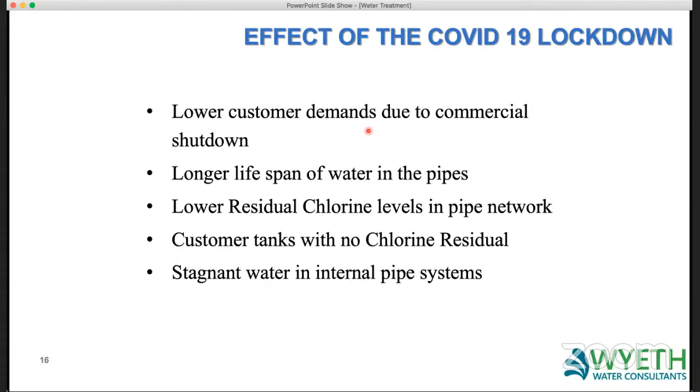Thank you everybody for attending today. As Dato mentioned, I'm going to be talking first about water treatment and the supply side of things, which is the disinfection and chlorination of water in the pipes to reduce any risk of bacteria forming or getting to our houses through our taps from the water supply system.

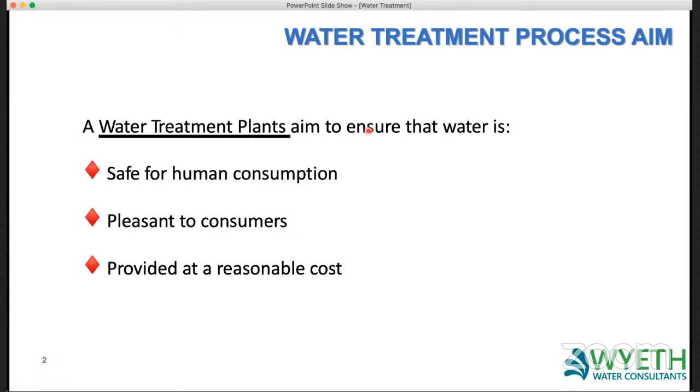All water supply companies have water treatment plants that they use to treat water from the raw water supply, whether it's from a dam, a river, or a ground source. The main aim for these water utilities is to make the water safe for humans, not just from the output of the plant, but also going through the pipes and coming out of the customer's tap. Ultimately the water companies would hope that the water coming out of your tap is drinkable, and that would be their ultimate aim.

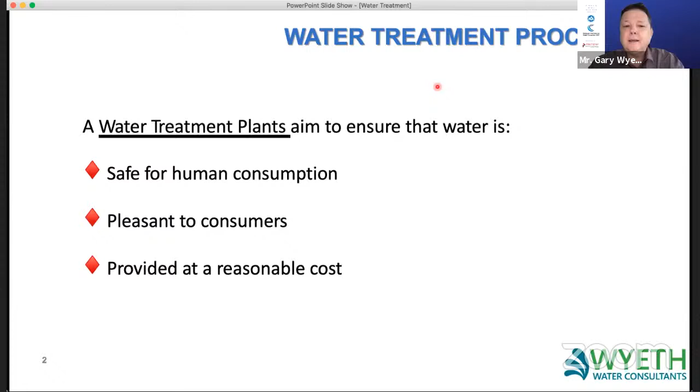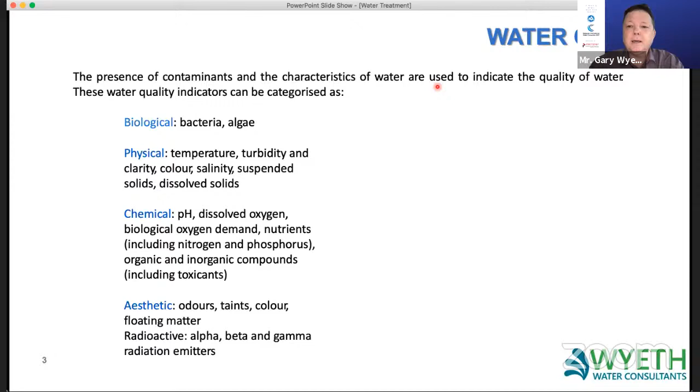There are lots of criteria that water companies look at with raw water sources. Probably one of the main ones is physical, which is turbidity, suspended solids, and color - they want to get most of those out so you have nice, clean, clear water coming in. There are also other chemical and aesthetic criteria, and we sometimes put in additional treatment processes to remove those problems. But the other main criteria is the biological one - bacteria and algae - and that's another critical factor the water companies are trying to treat at their water treatment plants.

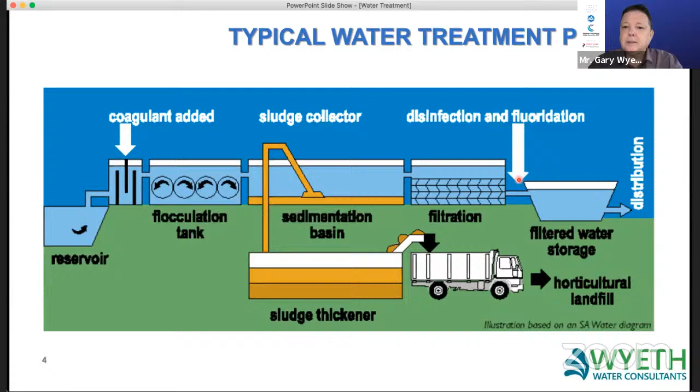But it's actually the disinfection that we're looking at, and this is where we want to get rid of the bacteria. At the end of the system, after filtration, we would try to disinfect the water to get rid of the bacteria that are naturally in the raw water source.

There are a few methods for disinfection: chlorine gas, chloramines, ozone, ultraviolet, chlorine dioxide, hypochlorite. So there are various ways we can do it, but generally chlorine is used in most water supply systems, either as a gas or a solid or a liquid. Generally it's a gas for a medium to large size water supply company, but the smaller ones would move more towards a solid, which requires less maintenance and is not so dangerous in terms of handling.

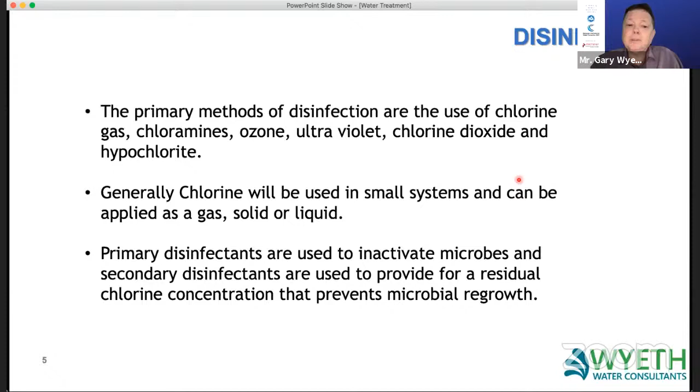With disinfection, we actually have to look at it in two different ways. We have primary disinfection - disinfecting the raw water and the bacteria in it to get rid of that initial bacteria. But then there's secondary disinfection, which is where we provide a residual chlorine - additional chlorine that stays in the water as it flows through the pipes to prevent microbial regrowth.

So when water companies are dosing their chlorine, they're looking at it in two different ways: the chlorine demand, which is how much chlorine they need to put in initially to get rid of existing bacterial growth in the raw water, and the free residual chlorine. This is the key one - the residual chlorine that will still be in the water as it leaves the treatment plant and moves through the pipe system.

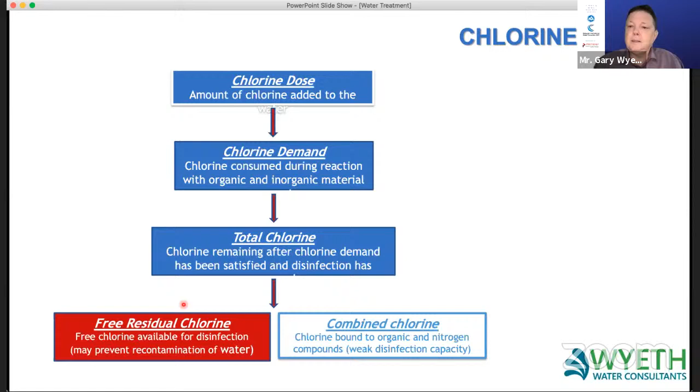So you may have a water treatment plant which has 2 milligrams per liter of chlorine residual coming out of the plant, but they've actually put in more than that to kill off what was already there in the raw water supply.

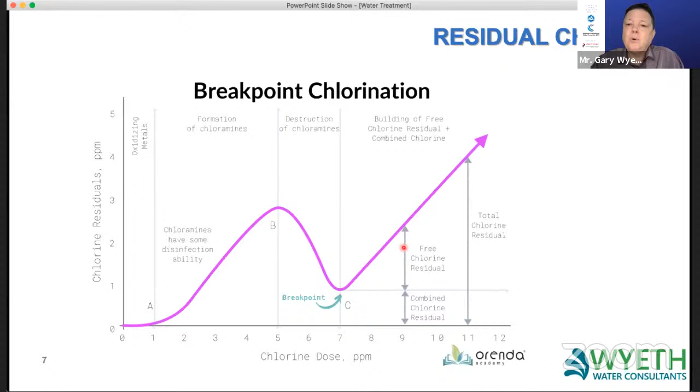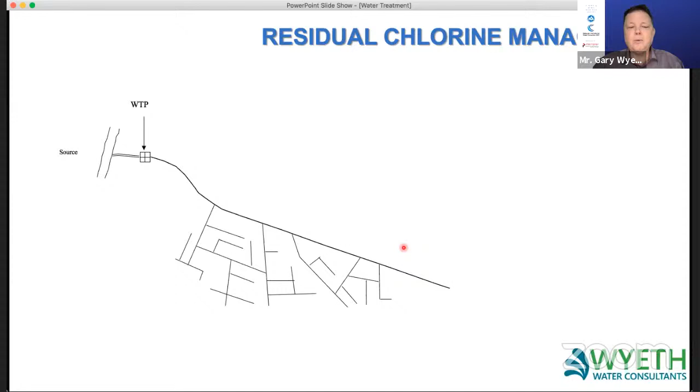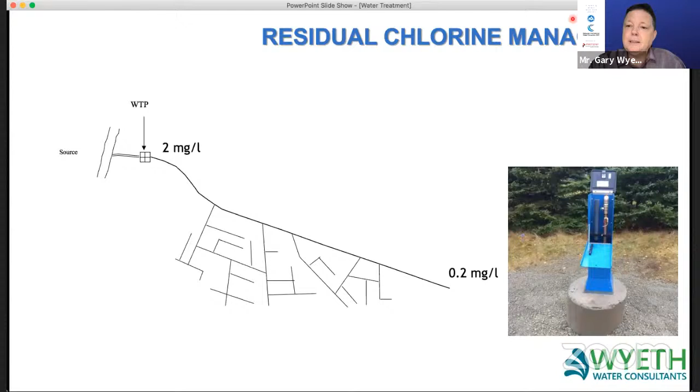These sampling points tend to be at the extremities of the system, because that's where you want to have your minimum chlorine levels. So we're looking at probably a minimum of 0.2 milligrams per liter. And so what they would do is adjust the residual chlorine at the outlet of the treatment plant to make sure that you're achieving that minimum residual chlorine at the end of the system.

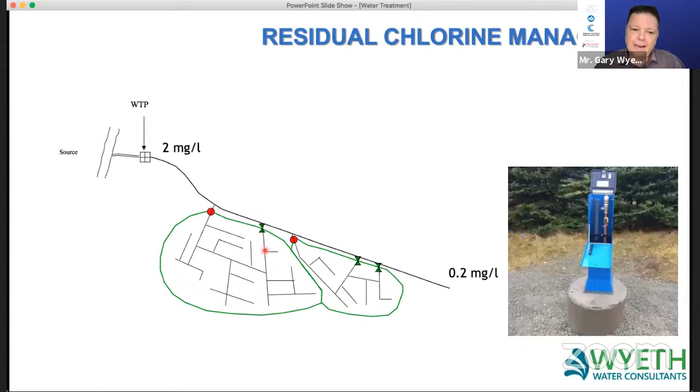And what can happen is we can actually get stagnant water at the end of these pipes here. So if you do have a length of pipe like this, which comes to a closed valve, and there are no customers towards the end, then flushing becomes a necessity to get rid of that stagnant water, especially after a number of days in there. So the water companies are looking to put in their residual chlorine to achieve this minimum residual chlorine at the end of the system.

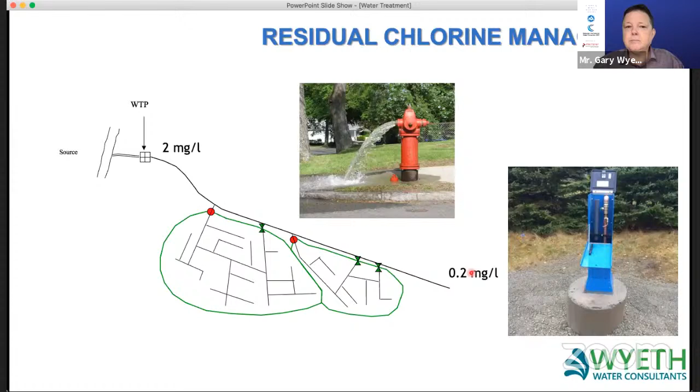But what can affect that chlorine as it moves through the system? Water age. Chlorine will naturally dissipate over time as it goes through the system. So we have to be aware of how long the water is taking to flow through the network, and this is something the COVID-19 lockdown will have affected. Instead of demands at 100% and water taking maybe 5 days to get to the end, you might have demand at 50%, so it's now taking 10 days. And of course, the chlorine will be dying off over twice as long a period.

Storage tanks. When we have storage tanks where water flows in, if we're not getting the level of the tank dropping and filling again, you're not actually turning over the water in the tank. This can mean that you're getting stagnant water in your tanks as well. So it's always best to set up your tanks with some sort of level control so that you're getting a fall and rise from them.

Limited customers in areas. Normally we look at rural areas, because in rural areas you have limited customers and that's where it's going to get affected. But during the COVID-19 lockdown, we're also looking at industrial areas where factories have shut down. So now an industrial area which used to have very high flows feeding all of the factories has very low flows or sometimes zero flows, and you're going to have a lot of stagnant water in those pipes.

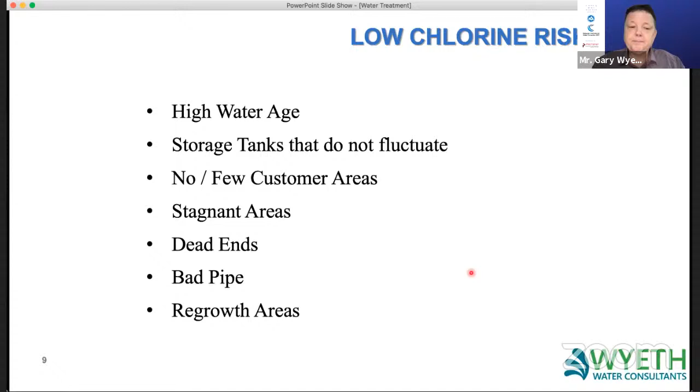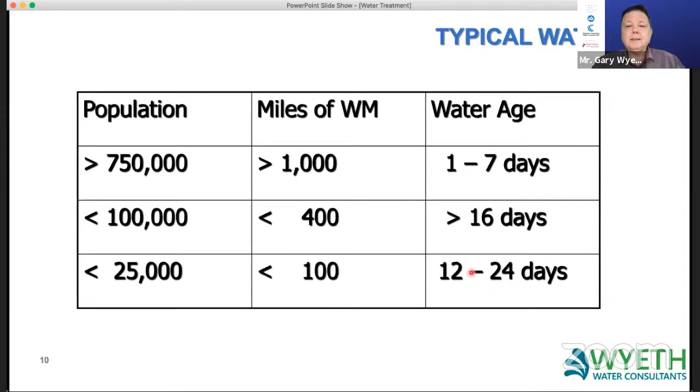So that's something that water utilities have to be aware of, that their water is going to be in the pipes longer. How do we mitigate these? Well, it's reducing the detention time in storage tanks. Maybe we can look at bypassing storage tanks if the flows are very low during these lockdown periods. We need to ensure turning over of distribution systems, and this may mean flushing in some places to get out there and start flushing the mains.

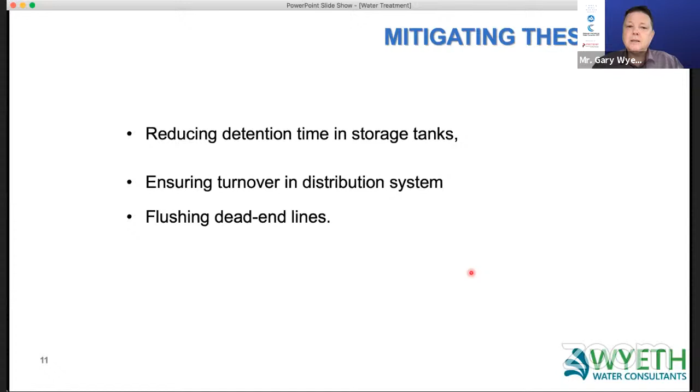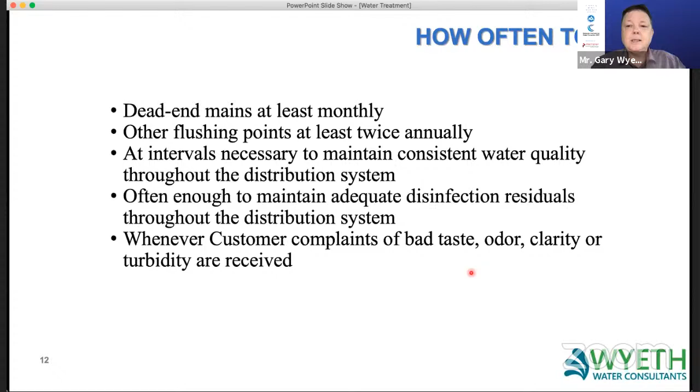How often should we flush? Well, if it's a dead end main, we should really be flushing it every month just to clear that stagnant water. Other parts of the network, maybe twice a year. But what's more important is to listen to customer complaints of bad taste, odor, or even turbidity. And those can be indicators of where your pipes need to be cleaned, and that's where we can go out and start to flush.

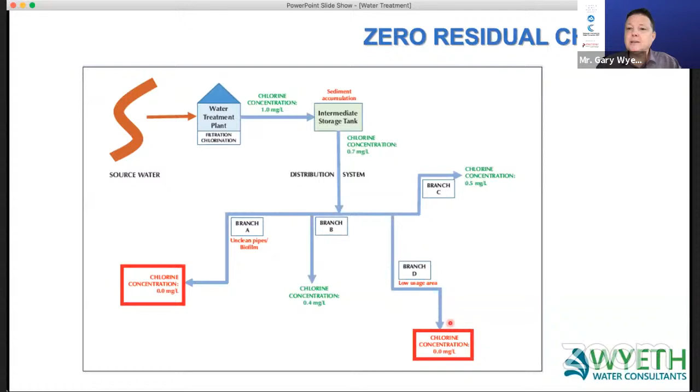Secondary chlorination is a way that we can get around this. So primary chlorination is where we would add the chlorine at the water treatment plant. But down in the distribution system, there's 2 ways of doing it. The first way is if at the end of the system, the residual chlorine is 0, we can go back to the primary chlorination and lift it up, so add more chlorine. But of course, if you do that, you're going to then start to get high chlorine levels close to the treatment plant, and you may get customer complaints of taste or smell from the chlorine.

If you can't increase the chlorine at the treatment plant, you can keep that the same, but you can add in a secondary chlorination system downstream in your network. And a lot of utilities would do that, where they would have a chlorine pump system that pumps chlorine into their pipes at remote areas.

Now, of course, it is possible if you have a large customer, such as a factory industrial unit, a university that has a lot of land, or even a housing development that has a large number of houses or condominiums, they could actually develop their own secondary chlorination system just to make sure that the chlorine is sufficient within their own pipe network.

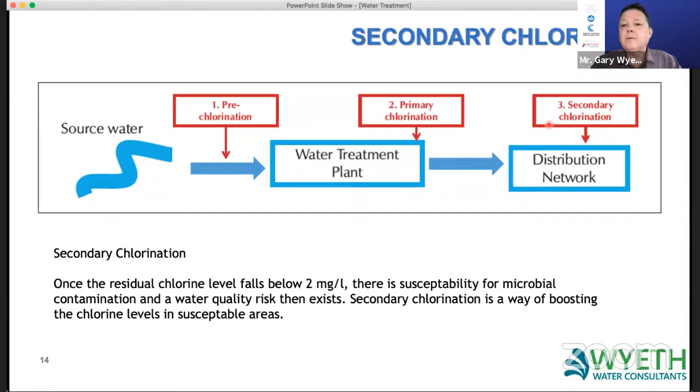Now, customer tanks are a key, really, because a lot of large customers have water tanks where they can store normally 24 hours demand. Now, what's going to happen is during the lockdown, we're going to have some places like factories, hotels that have shut down, where the water is going to remain stagnant in these tanks, and also in the pipes that are after the tanks. So once we then start to open up these factories, these hotels, there needs to be a way to actually empty these tanks, put some new chlorinated water in, and then maybe super chlorinate to just clean the pipes before it goes through.

What's probably a bigger problem is when you have hotels or offices that have remained open. And instead of having a water tank that's got a 24-hour supply in here, we've suddenly got a tank which has got maybe 2 weeks or 3 weeks supply, because the hotel's only got 10 or 20 rooms occupied. And that means that the water is actually staying in there a long time, but the hotel or the factory or the office block still think that the water is safe. But because it's being retained such a long time, it could be a problem.

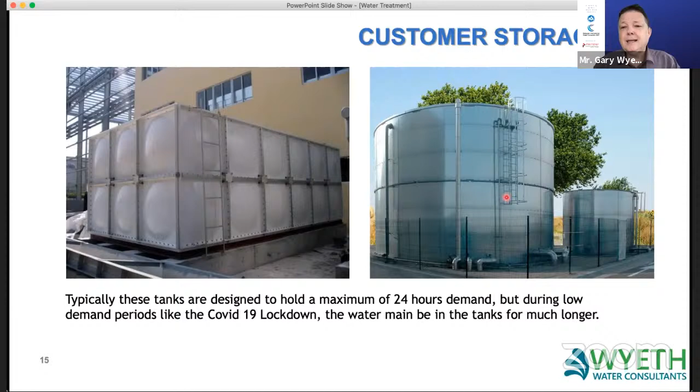So the effect of the lockdown is basically lower customer demands, mainly due to the commercial shutdown, which is factories, shops, offices, but also the hotels as well, many of which still aren't open. And the ones that are open have got very low occupancy. This leads to longer lifespan in the water pipes and also in the customer tanks, which then leads to lower residual chlorine levels in the pipe network.

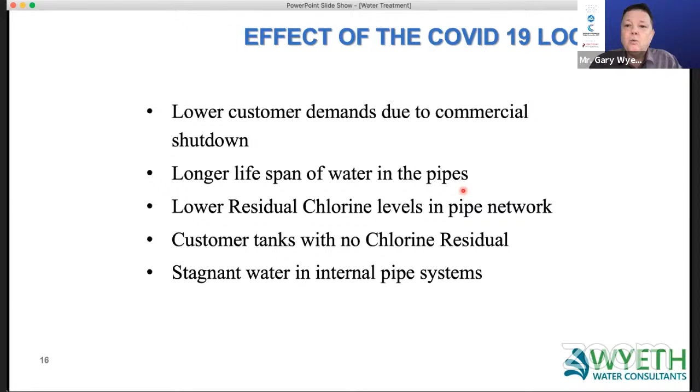Unless you have a very good water utility that's monitoring these chlorine levels constantly and is adjusting the chlorine at the treatment plants. And then, of course, the customer tanks that have got no chlorine residual, which is then flowing into your buildings. I think Dr. Agustin is going to be talking next about the buildings and biofilms that could happen in our pipes when you've got zero residual chlorine. And that comes from having stagnant water or water with no chlorine inside it.

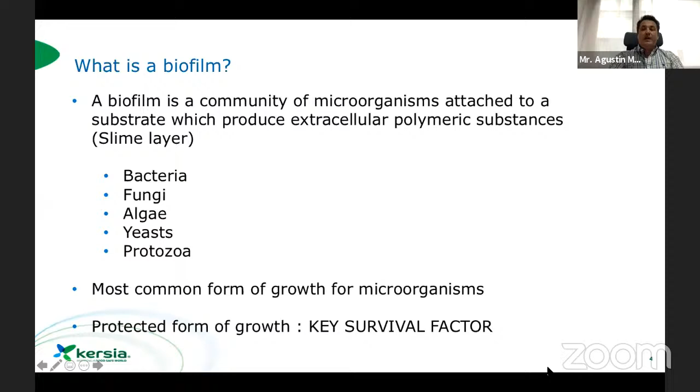It's the most common. We can't see your PowerPoint. Have you shared screen? We cannot see your PowerPoint. Sorry about that. So what are you seeing now? We just see you. Let me see. You need to share screen at the bottom. Yeah, hang on a sec. Apologize. Okay, can you see now? So I missed a couple of slides.

Okay, sorry about that. So where does the biofilm grow? The biofilm can grow everywhere. Basically, they find a weak attachment first, then they become a strong attachment. The attachment gets into the polysaccharide substrate that I described before. It's a very technical issue, but everybody has seen it any time you've seen a dirty pipe, or you had to change a pipe, and inside the pipe you can see a lot of different colors, as Gary described before, with a bad smell, and usually that is where all the germs survive and grow.

How do they form? They form from what they call planktonic cells, the first cells that go into the pipe, and then they start growing and secreting different substances like carbohydrates, proteins, and fat, and they provide the protection of the whole biofilm. So biofilm provides a protective form of growth from environmental stress. Antimicrobial agents, ultraviolet, metal toxicity, acidity stress, dehydration, even evasion of the immune system, all are protected against by the biofilm.

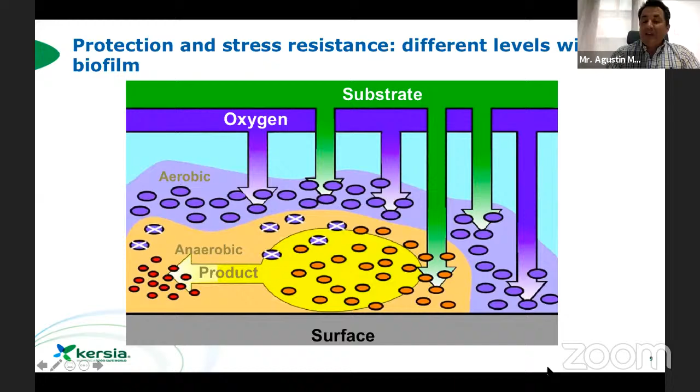Every now and then, the microbiology will break the barrier and move into planktonic cells, as you can see on the right part of the screen. And these cells will go into the water or into the air, etc. Basically, we have persister cells, and this is a subpopulation of biofilm which can remain viable after treatment with antimicrobials.

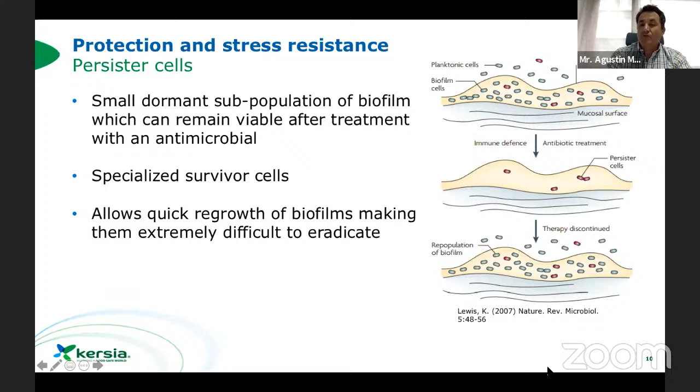They are specialized survivor cells, and they allow quick regrowth of biofilms, making them extremely difficult to eradicate. So biofilm is a big challenge, and it's very interesting to have it in mind every time you are developing a water conduction or water pipe system. There are many kinds of actions that you can take, as Gary has been taking, such as flushing before you start a new reopening of a water conduction.

In a water pipe setting, which is our topic today, biofilms are everywhere. They contaminate all the water phase by detaching the biofilm organisms from the pipes. So the most important thing is to think about that before we reopen any installation that has been blocked for many hours or for many days or weeks. The biofilms are always related to the occurrence of black water or malodors.

We probably won't be able to eradicate them completely, but the interesting thing is to think about them and take measures where the conditions of the water distribution have been altered. And that's why in these current circumstances, Gary described very well how many pipes have been closed down, and the conditions of the pipes have been altered in terms of chlorination or any other cleaning system that we applied in the past.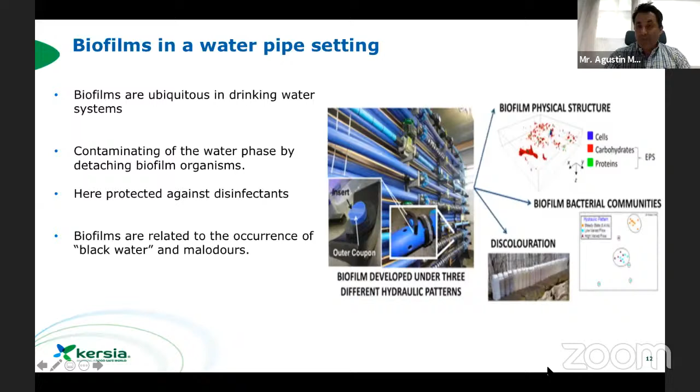We also see biofilms corroding metals, mineral materials, and synthetic polymers. When we think about biofilm and about pipe construction, we have to think about different things like the materials that we are going to use. Nowadays, we realize that some of the plastic materials are a better solution to avoid or to delay the growth of biofilm, and are probably a good substitution for the old copper or metal materials that we were using in the past.

Very interesting as well is that current studies have told us that biofilms increase with the flow velocity of the water when the water goes from 0 to 1 meters per second. Later on, when it goes from 2 to 6, the velocity is a protection against the biofilm. So it's very interesting to see that when there is stagnation or there is very little flow, less than 1 meter per second, the persistence and the growth of biofilm can be much higher.

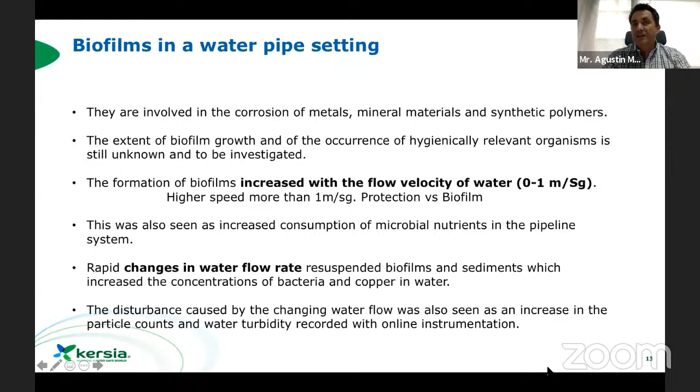So rapid changes in water flow will break the current biofilm and produce the liberation of the planktonic cells, as explained before in the previous slide. And that will go into the water, and we will need to clean that water for a period of time to make sure that the new water is not bringing bacteria with it.

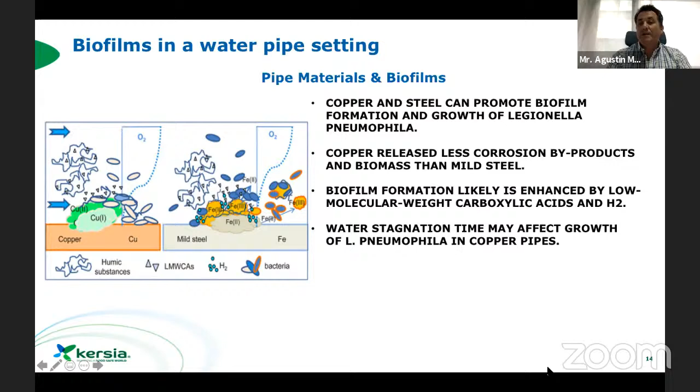This is an example of how different materials interact with the growth of biofilm, and we can see that copper and steel can promote biofilm formation and growth of Legionella pneumophila as well. Copper releases less corrosion byproducts and biomass than mild steel, but potentially the best product is the use of plastic, in particular PVC materials in the pipes, and that's why most of the old pipes are being substituted now.

The WHO recommends that drinking water should be free of any organisms. The water should be disinfected before the point of consumption and also in the plant. And as Gary described, there are different stages from the time we clean the water in the water plant until it's consumed by the consumer in the house, in the factories, or at different points of consumption. So it's very important that through all these stages, we keep thinking about the biofilm and about the possibilities of reducing it.

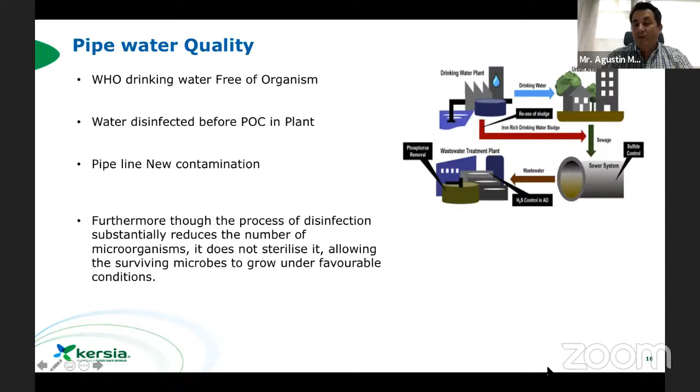Again, with these new circumstances of confinement and lockdown, the problem we have is not particularly the growth of COVID in the water, but more the problem we can have because of stagnation, the lack of chlorination or water treatment, and the possibility of having a bigger growth of biofilm and other potentially dangerous microbacteria.

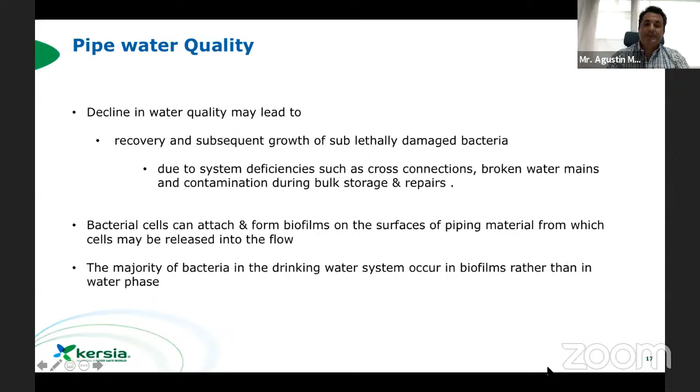So we already discussed the influence biofilm can have on the taste and odor of the water, and also on the corrosion of the pipes, and also the release of iron particles into the water in case of the metal pipes.

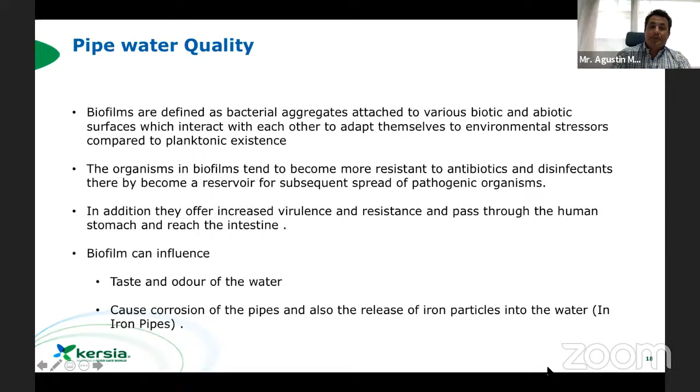So the challenge that we have is understanding what is a realistic biofilm level, how much biofilm can we afford to have in a pipe. Every biofilm is different and has multiple species. What are the most important species for water treatment? How can a robust biofilm be consistently reproduced? The problem is that we don't have huge guidelines available for a general biofilm kill claim. So it's still a big topic.

The interesting thing is that we are already discovering different substances and different approaches that can help us control the biofilm and avoid massive biofilm and subsequent planktonic cell liberation into the water.

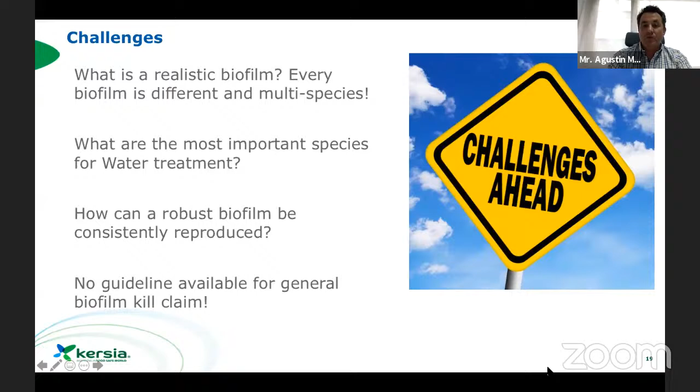How can biofilms be targeted? Biofilms more accurately represent the occurrence of microbes in the real world environment, yet free living cells remain the model for testing. Currently, there is no standard to evaluate efficacy of disinfectants against healthcare-associated biofilms and water treatment biofilms.

Nowadays, we are particularly interested in some of the work we are doing with the Environmental Protection Agency in the United States to produce guidelines in terms of dealing with biofilm. We have some potential products and opportunities for projects where we are testing biofilm attack and products to preserve the long-lasting effect of the substances we can add to the water, always being environmentally protective and thinking about safety for the consumer as well.

We always think that safe water is a consequence of a safe world, and if we think that biofilm is probably the root of microbiology problems in the water, we need to start investigating and dealing more efficiently against the biofilm.

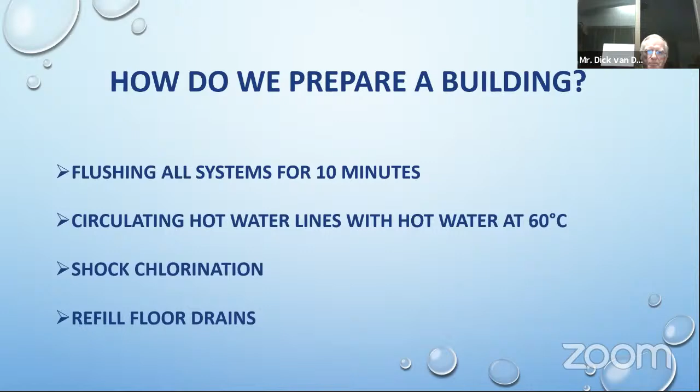Now, flushing with hot water is very difficult. The water heaters may not have enough capacity to do that continuously over a period of time, opening all the taps in a building, particularly like in a hotel. The individual flow-through heaters, as we use a lot in Asia, don't have the capacity to do that. So hot water flushing is probably not the best way to do it. Also, dead ends in pipes, even 30 centimeters, will not get to the temperature that you want. Cold water lines, you can't rinse them with hot water - you can't cross these lines.

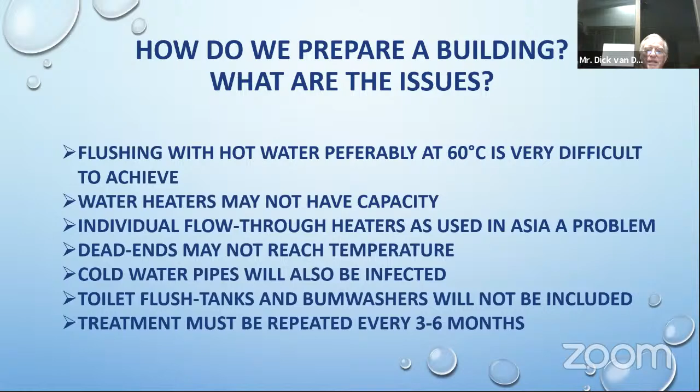Then toilet flush tanks have been sitting there for weeks. Bum washers will be infected. And if you want to do a good job, you should do this treatment every 3 to 6 months. Nobody does it. So we have a number of methods available.

Chlorination is one method, using bleaching powder that you dissolve in water. You have sodium hypochlorite that you can buy in canisters or tanks, or even have a tank truck coming with 3,000 or 5,000 liters, depending on the size of your building. There is gas chlorine that comes in pressurized cylinders. There's chlorine dioxide.

And there is sodium dichloroisocyanuric acid - sorry, that's a mouthful. And there is trichloroisocyanuric acid. These are products that are used a lot nowadays.

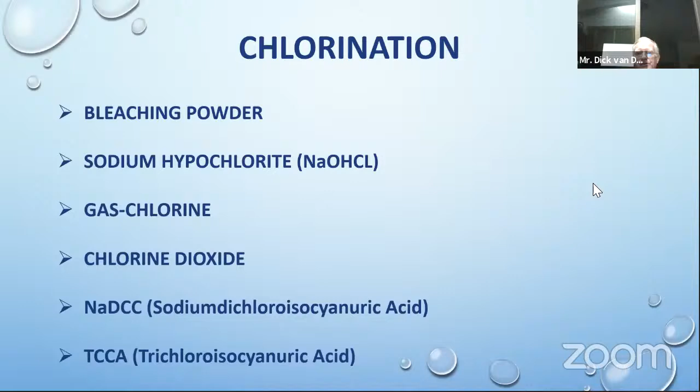The bleaching powder, the hypochlorite, and the gas chlorine are quite unstable, especially in hot climates. The first two will lose their strength quite rapidly in storage. Gas chlorine, of course, is used directly from the cylinder through a special unit, but it is a very dangerous product. You have to have good, well-trained staff to handle that.

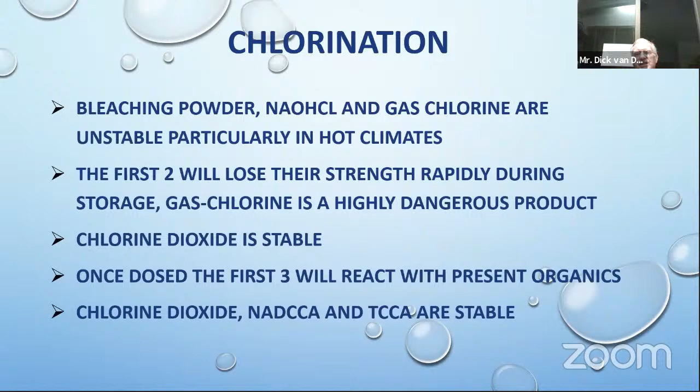Chlorine dioxide is quite stable. And then both isocyanuric acids are also actually very stable. The isocyanuric acids are supplied as granulates or tablets.

The moment they come in contact with water, they will form hypochlorous acid, or HOCl, which is the most potent chlorine product. In dry form, they can be stored for 3 years. They typically come in pails, in buckets with a lid, or in a cartridge, and they won't lose their strength. They will be 100% even after 3 years if you open them.

These products have been used for many, many years in swimming pools, but they have never been used for drinking water until 2001, when some brands were approved for drinking water by the EPA in the US. One top brand of trichloroisocyanuric acid is produced under pharmaceutical protocols and is halal certified. And these products are typically tested and recommended by WHO, UNICEF, NSF, and others.

Then there's a second method to do it, with ultraviolet light. I've been doing that since 1976. Ultraviolet started already 110 years ago in the city of Nice in France, where they built the first water treatment plant with UV disinfection.

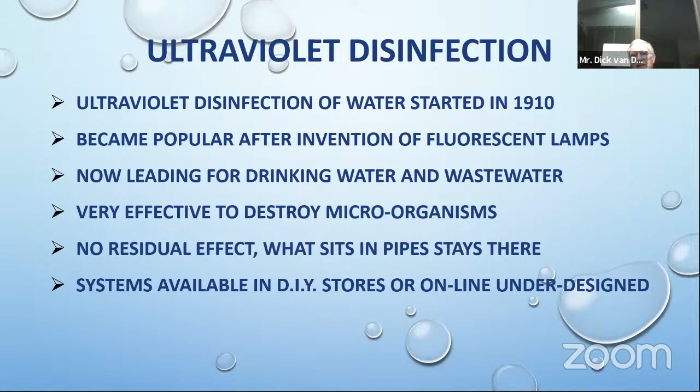Then there's a third application, that's ultrafiltration. Ultrafiltration is a real mechanical removal of all micropollutants. UF is a brother or sister of reverse osmosis, RO. It's a membrane filtration, and most of the time the membrane material is made of a polymer like PVDF or PAN, which is polyacrylonitrile, or polysulfone. It depends on the application.

There's also ceramic now. They are ideal for point of entry in buildings. Once the water has passed through all these pipelines and picked up all kinds of dirt from biofilms, etc., they will remove it before the water comes into the building.

Unfortunately, it doesn't have a residual, just as ultraviolet, but since you have removed basically everything, in many cases you don't even need a residual if the distribution system is not too long. But always leave it to professionals if you install systems like this.

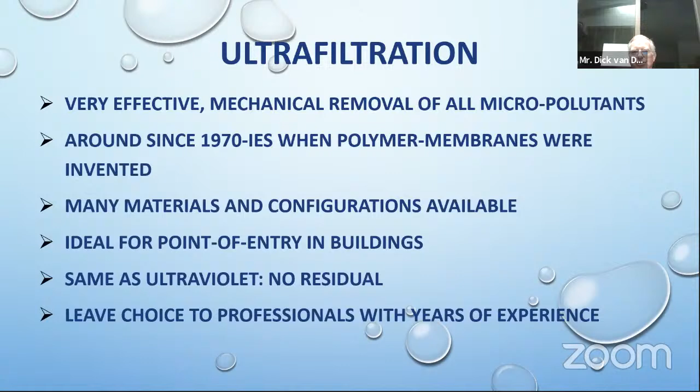Then there is a very old method that is silver contacting. That has been around for more than 2,000 years. In India, the Roman Empire, they didn't know why, but they knew that when they were eating from silver plates and drinking from silver goblets, they wouldn't get sick. And in a lesser effect, copper did the same thing.

Silver is very active - it's more active than copper, and it can be dosed as attached to a powder in tablets and bonded to activated carbon. Or about 30 years ago, it was very popular in the shipping industry, where they would disinfect the water on board ships by adding silver through electrolysis.

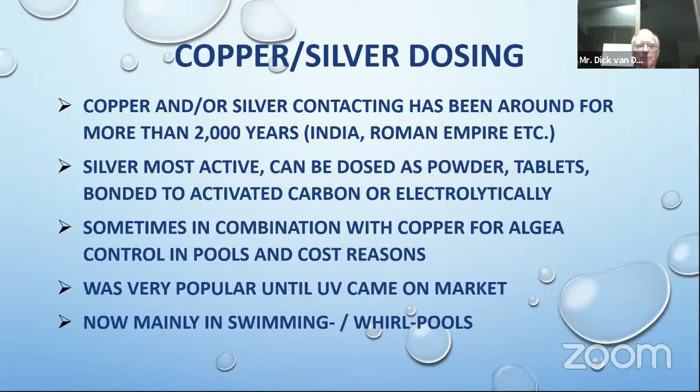Now they combine it sometimes with copper for algae control in pools, and of course, copper is a lot cheaper. It used to be quite popular until UV came on the market in a big way, and now it's mainly used in swimming pools. Then the last one is ozone.

Ozone is a very unstable product. It always wants to shed that one O atom, so it has to be produced on site. Typically, they do it by discharge of high voltage, between 5,000 and 10,000 volts, in oxygen-rich air, and then it's mixed in the water stream. It is a very potent oxidizer, and it reacts with everything, which means also with metals. So metal pipes and ozone don't like each other too much, and any residual that may be left over is gone very quickly if you do this job with ozone.

There's one negative aspect. If drinking water is produced from seawater by reverse osmosis or evaporation, vacuum distillation, the combination can form bromates. And just as gas chlorine, it's an extremely dangerous product. You really need professionals to handle it.

So what we do in ASEAN, now, after we have seen what can happen, Gary and Agustin have told you, I think chlorination at this moment is the best method to do because of its residual effect.

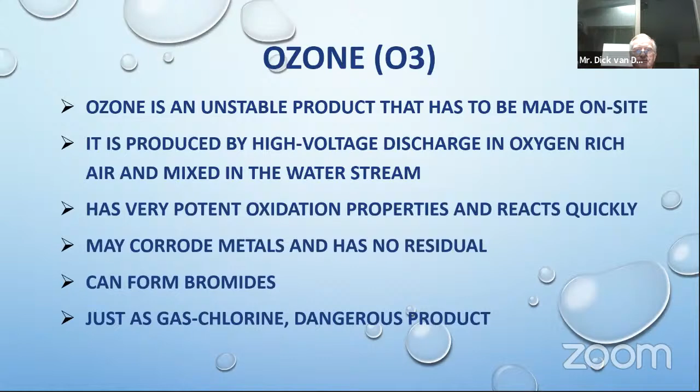Ideally, a combination of ultrafiltration and one of the isocyanuric acids would be used. But post-COVID, to get these buildings started up again, I should recommend starting with simple dosing systems that are easy to handle, no dangerous chemicals to store, and with stable products. And these are available. Then chlorination, in a building post-COVID.

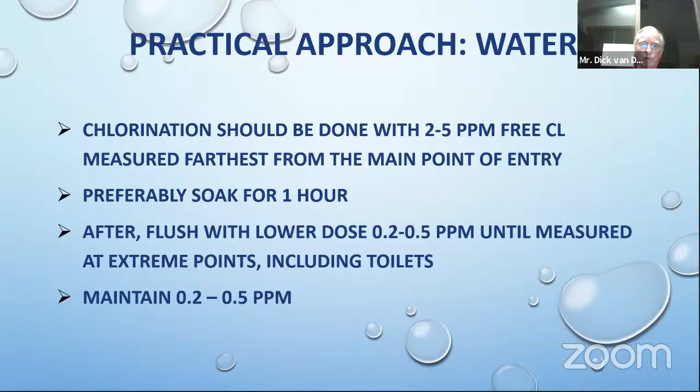This should be done with about 2 to 5 ppm free chlorine to start with, measured at the farthest point from where you inject the chlorine. Then let it sit for about an hour. That will make sure that the chlorine can react with all the organics in the system. After that, you flush with fresh water that has a lower chlorine dose, 0.2 to 0.5, until you measure that again at the end of the system, including the toilet bowls. Don't forget. And then maintain this level during the use of the water.

Now we were talking about water, but air conditioners also use water. Central air conditioners have humidifiers and cooling towers. Humidifiers are very dangerous things. I had an experience with them already more than 30 years ago, in a large office building in Belgium, where they had what we were calling sick building syndrome. And everybody got sick after a couple of days.

They claimed that it was because of the office landscapes that were very in fashion at the time, and windows couldn't be opened. But eventually they found that it came from the humidifiers of the aircon systems, where water was pumped around and sprayed in the air to bring more humidity into the air that was dried because of the cooling effect. And because this water was pumped around and dripped down in a tank, it took up all the spores from the air, and it was circulating as soup. I installed a small UV system in it in the loop, and within a couple of days there were no more sick building syndrome complaints.

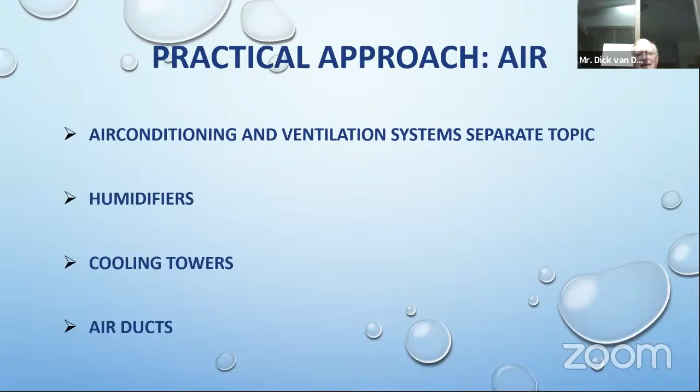We installed a very large UV system, 1 cubic meter per second flow, with a very high dose because Legionella is quite resistant, and we solved the problem. So please make sure that your cooling towers also have some sort of disinfection. Air ducts are quite simple—you just put a UV lamp in and anything will be solved there.

There's also a possibility in smaller cooling towers where you do a combination of sand filtration with UV and circulate part of that content over the system to keep the water in good condition. Or instead of sand filtration, you use ultrafiltration and a small chlorine disinfection, and that will save up to 80% in the formulated treatment chemicals, which is the major cost of running an air conditioning system. And you have the same effect.

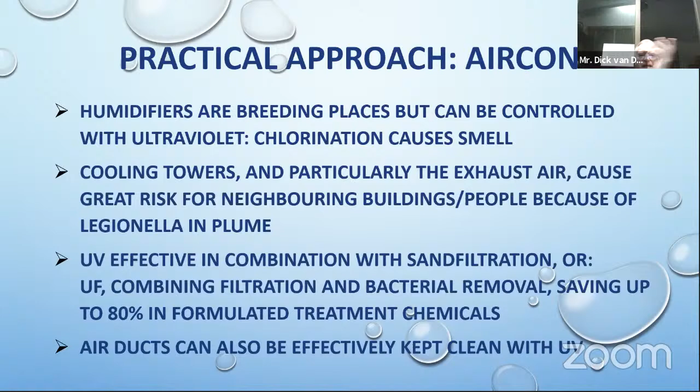Next to that, you save a lot of water because you don't have to purge so much. Because if you add all these chemicals every day, you get an increase of your conductivity. Your dissolved solids will go through the roof, and you have to dump about 10% of that water regularly. So that would be a very practical approach in aircon systems. And again, the air ducts can be kept clean quite easily.

So as a conclusion, make sure that all the buildings are treated before you let people in. The maintenance people have to be extra careful not to get infected by Legionella. As said, I don't think in these buildings that are closed, coronavirus is a problem, because if there are no people, there's probably also no coronavirus.

And follow the guidelines by WHO, CDC, etc., of preparing those buildings. And if you apply a technology, use a professional, not your around the corner plumber. And during the normal operation, check free chlorine in your water system. Thank you very much.

Here you can see slides of the technology that Gary, Dick, and Dr. Agustin is talking about.